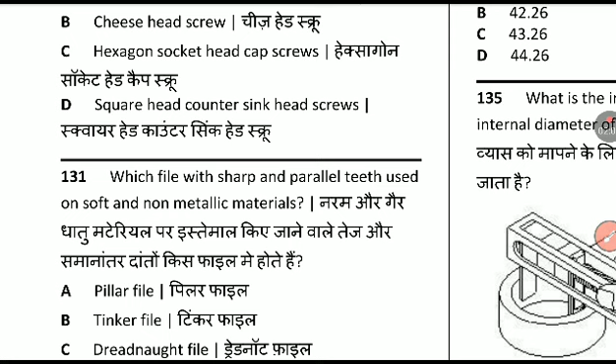131. Which file with sharp and parallel teeth is used on soft and non-metallic materials? Option A pillar file, option B tinker file, option C dreadnought file, option D warding file. Option C, dreadnought file, will be the correct answer for question number 131. Pillar file is used for filing narrow grooves, slots, and keyways.

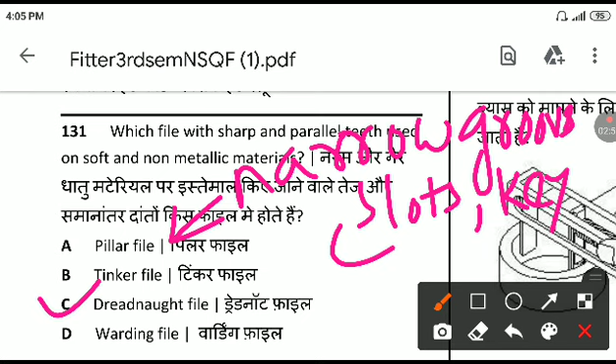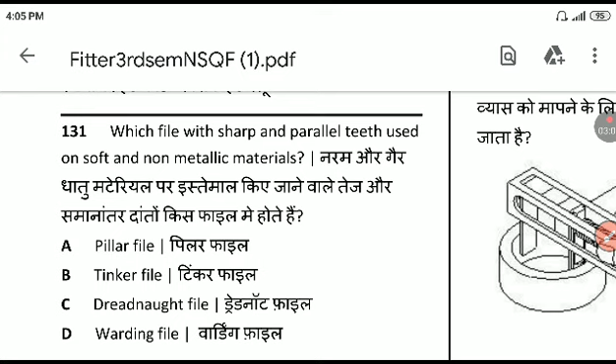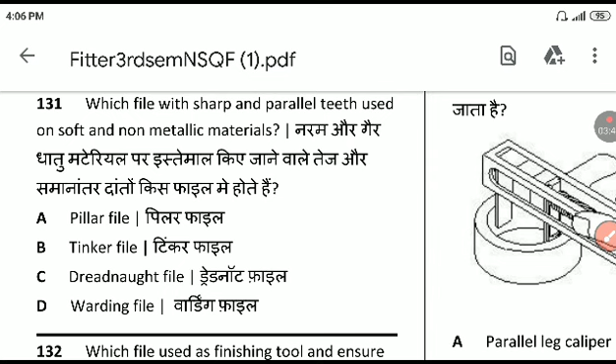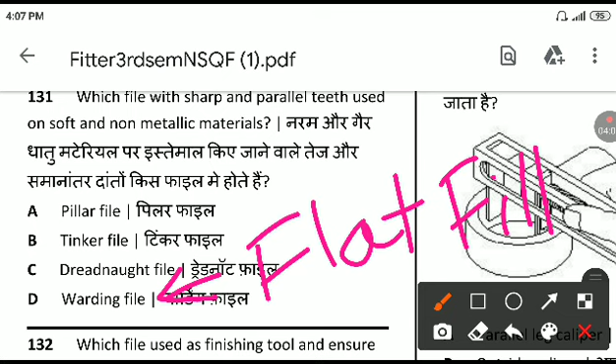Tinker file is used for finishing automobile bodies after tinkering. Warding file is used for flat filing, filing on slots, and keyways.

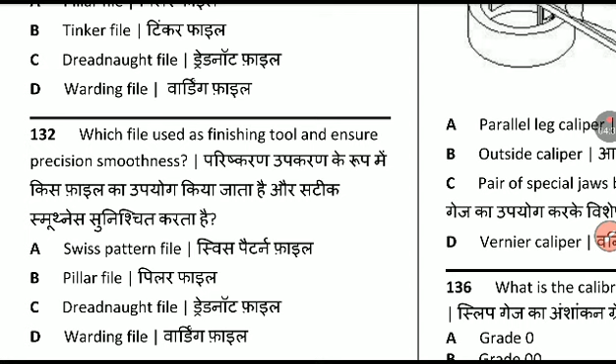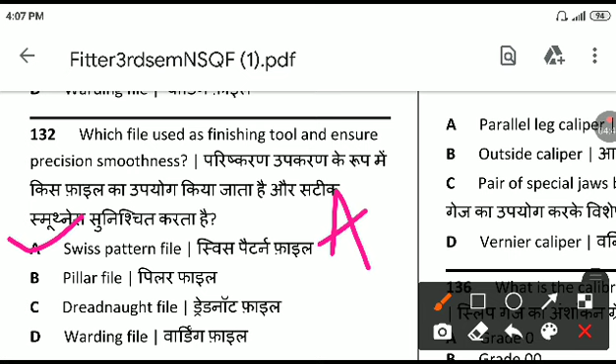Next question, 132. Which file is used as a finishing tool and ensures precision smoothness? Option A, Swiss pattern file, is the correct answer. Swiss pattern file is used as a finishing tool and ensures precision smoothness.

133. What is the thickness range of a BIS set of feeler gauge? Option B is the correct answer: 0.02 mm to 1 mm in steps of 0.02 mm.

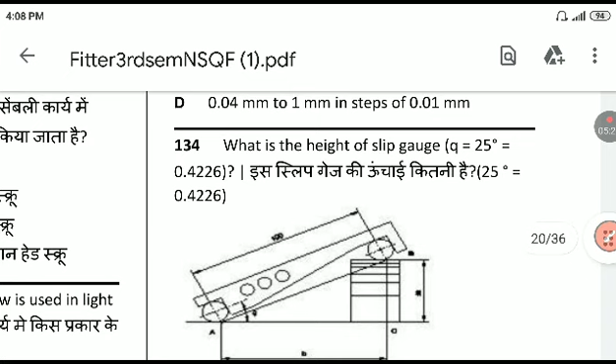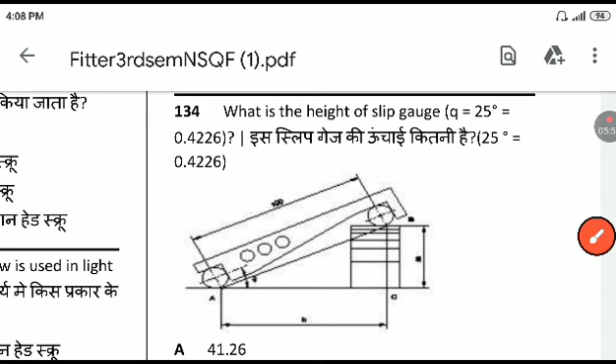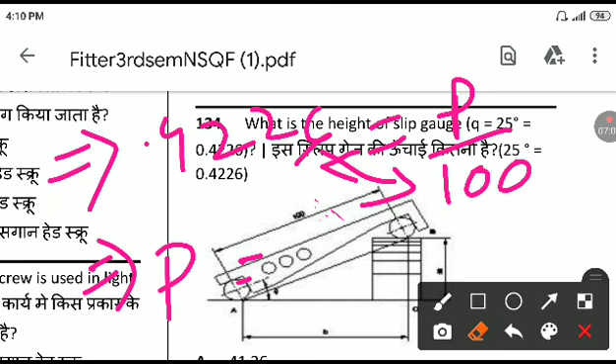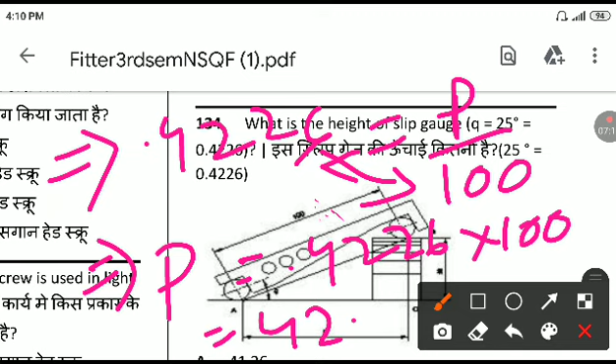What is the height of slip gauge, given theta equal to 25 degrees, sin theta equal to 0.4226? We know that sin theta equal to P by H, where theta means 25 degrees, P means perpendicular, which here is the height of the slip gauge, and H means length of hypotenuse, equal to 100. So sin 25 equal to P by H, that is 0.4226 equal to P by 100. By cross multiplication, P equal to 0.4226 into 100, that is equal to 42.26. Answer, option B.

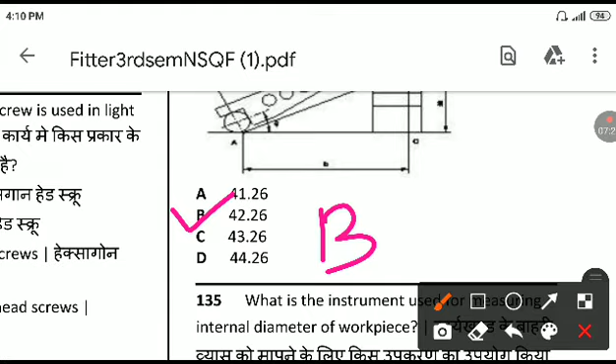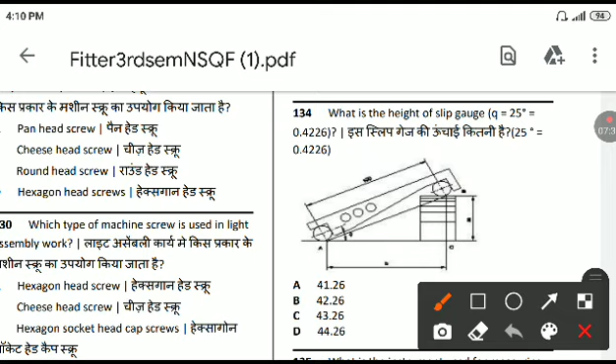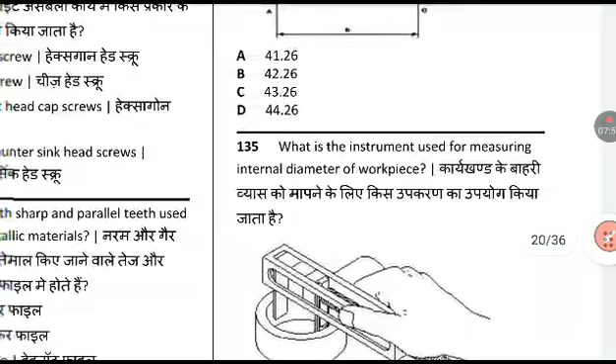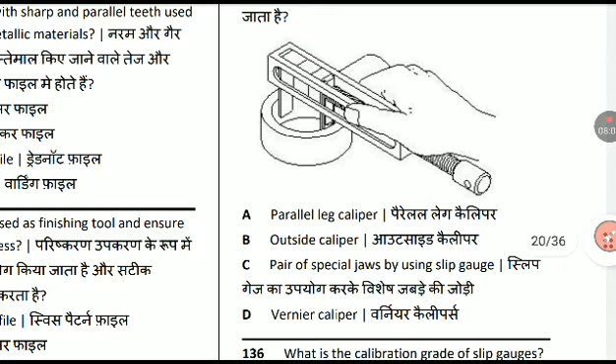What is the instrument used for measuring internal diameter of a workpiece? Options: parallel leg caliper, outside caliper, pair of special jaws by using slip gauge, or vernier caliper. Option C is the correct answer: pair of special jaws by using slip gauge.

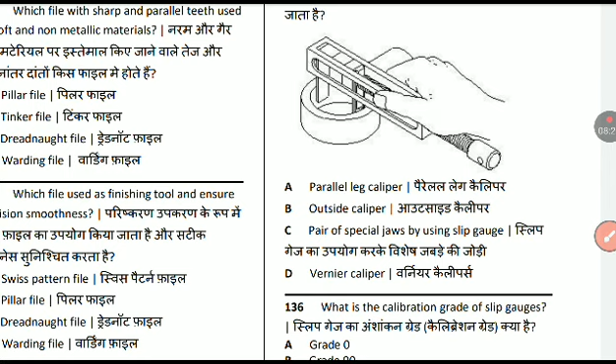What is the calibration grade of slip gauges? Option A grade 0, option B grade 00, option C grade 1, option D grade 2. Option B, grade 00, is the correct answer.

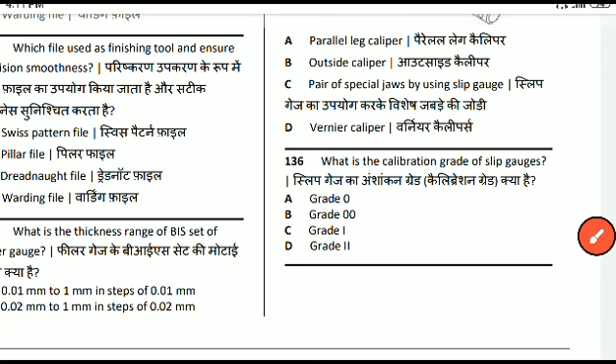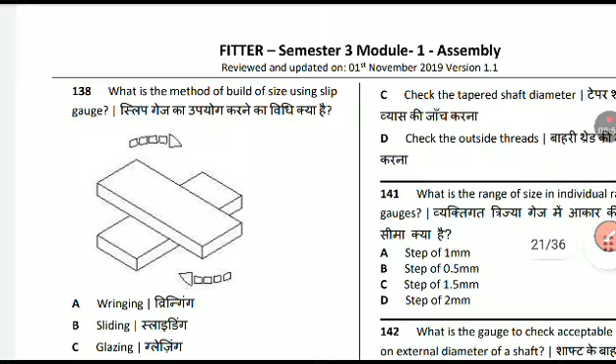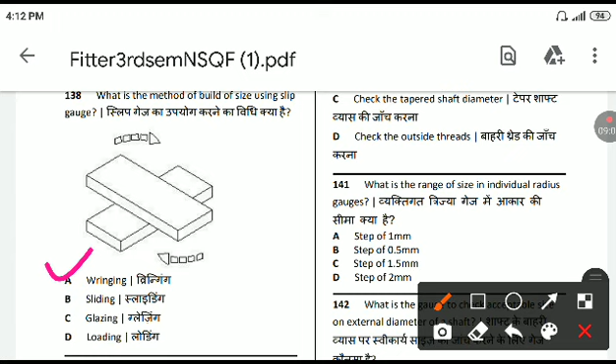What is the method of building up a size using slip gauge? This process is called wringing, option A. Wringing means joining two slip gauges together. The process in which slip gauges are joined together is called wringing.

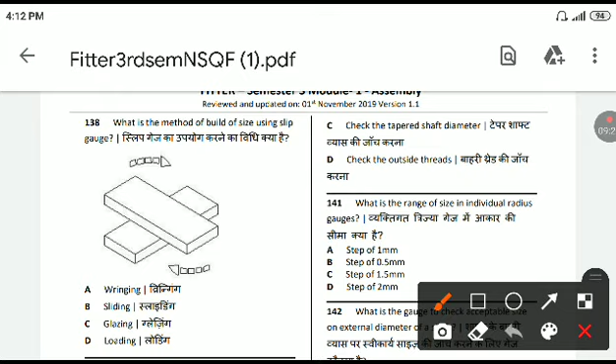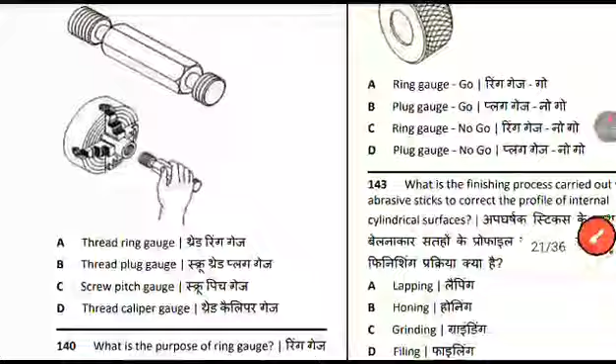What is the gauge used for checking threads? Option A thread ring gauge, option B thread plug gauge, option C screw pitch gauge, option D thread caliper gauge. Option B, thread plug gauge, is the correct answer.

What is the purpose of a ring gauge? Option A, check the outside diameter. Ring gauge is used to check the outside diameter and check the external dimension. Option A is the answer.

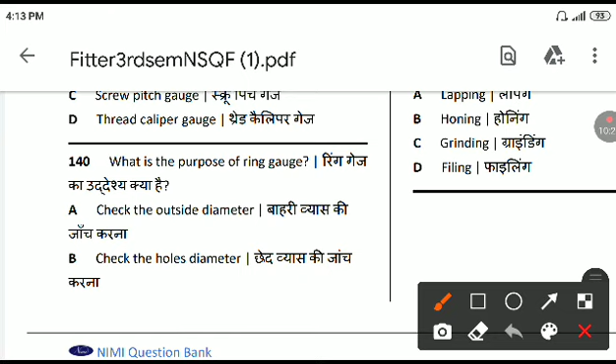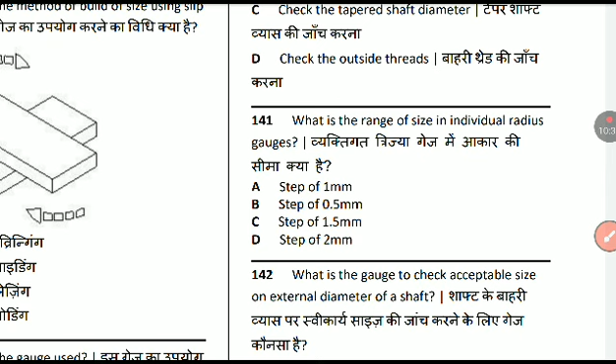What is the range of size in an individual radius gauge? Option A, in steps of 1 mm.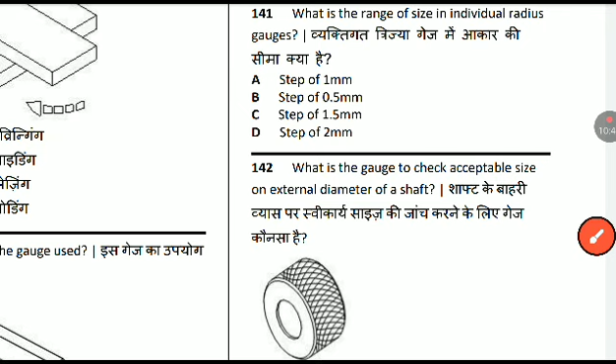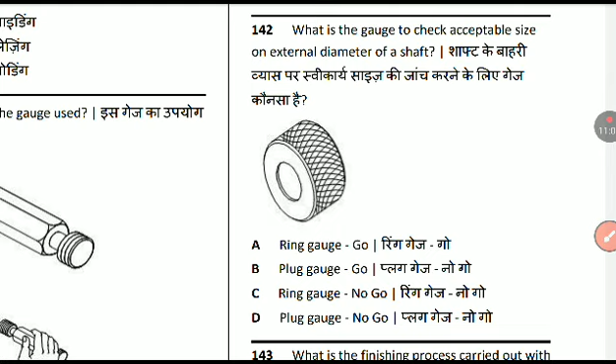What is the gauge used to check acceptable size on the external diameter of a shaft? Options: ring gauge go, plug gauge go, ring gauge no go, plug gauge no go. Ring gauge go, option A, is the correct answer.

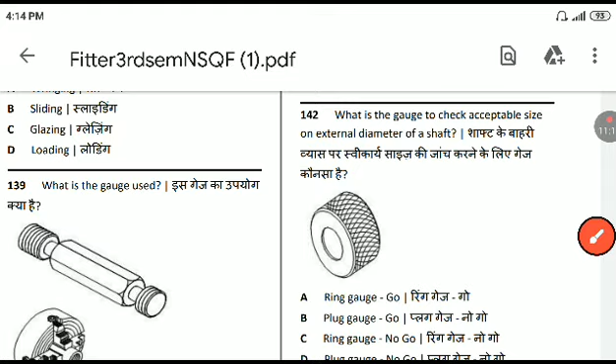What is the finishing process carried out with an abrasive stick to correct the profile of an internal cylindrical surface? Option B, honing, is the correct answer.

Which lapping material is used for easy charging and rapid coating? Option A cast iron, option B copper and brass, option C close grain cast iron, option D white cast iron. Option B, copper and brass, is the correct answer.

Which lap material is inexpensive and can be expanded if worn out? Options: brass, cast iron, lead, bronze. The answer is option C, lead, also known as plumbum, Pb.

Which type of abrasive material is extremely hard and used in lapping for heavy stock removal? Option A silicon carbide, option B aluminum oxide, option C boron carbide, option D diamond.

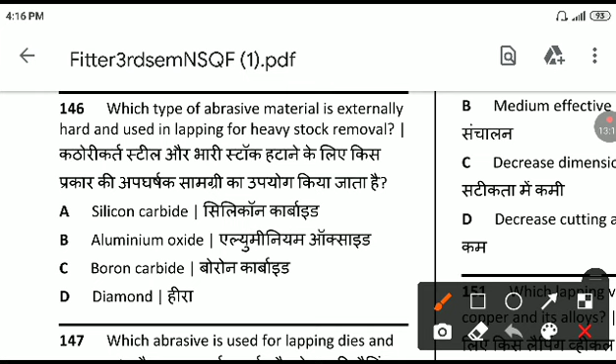Which abrasive is used for lapping dies and gauges? Option A, silicon carbide. Option B, boron carbide... wait, silicon carbide. Option C, diamond. Option D, aluminum oxide.

Which is the hardest of all abrasive materials and used for lapping? Option A, silicon carbide. Option B, boron carbide. Option C, diamond. Option D, aluminum oxide. Answer: diamond, option C.

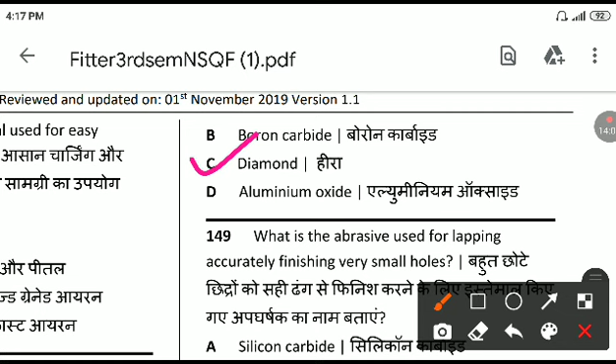What is the abrasive used for lapping and accurately finishing very small holes? Option A, silicon carbide. Option B, diamond. Option C, boron carbide. Option D, aluminum oxide. Answer: diamond, option B.

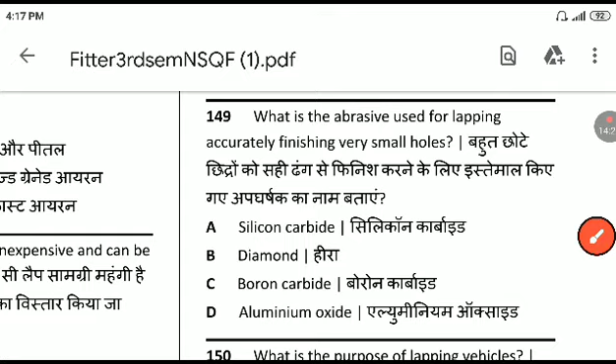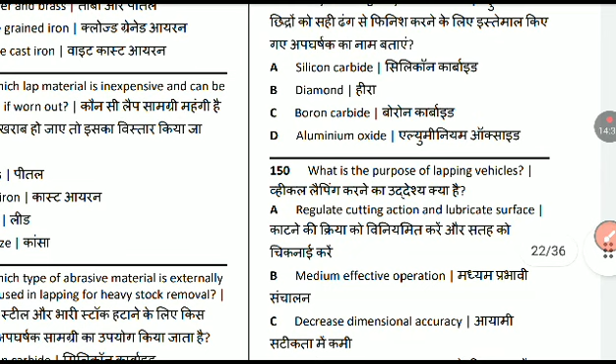Question 150: What is the purpose of lapping vehicles? Option A, regulate cutting action and lubricate surface. Option B, medium effective operation. Option C, decrease dimensional accuracy. Option D, decrease cutting ability.

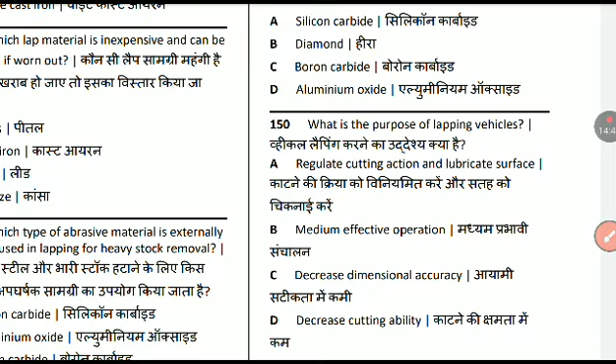What is the purpose of lapping vehicles? Question 150, option A: regulate cutting action and lubricate surface. Question 151: Which lapping vehicle is used for lapping copper and its alloys?

Option A, vegetable oil. Option B, machine oil. Option C, soluble oil. Option D, petroleum jelly. Used for lapping copper and its alloy - answer: option C, soluble oil.

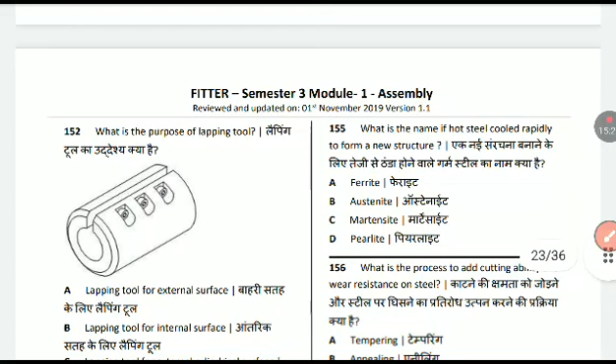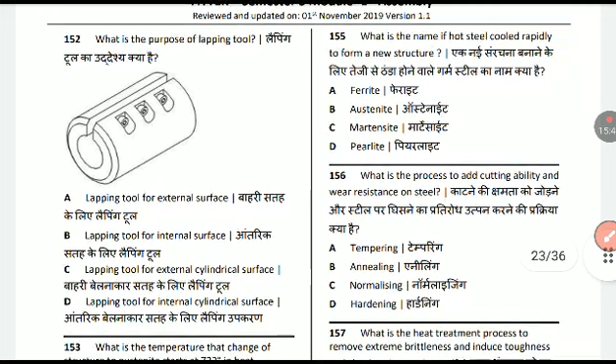What is the purpose of lapping tool? Lapping tool for external surface, lapping tool for internal surface, lapping tool for external cylindrical surface, lapping tool for internal cylindrical surface. Answer: lapping tool for external cylindrical surface, option C.

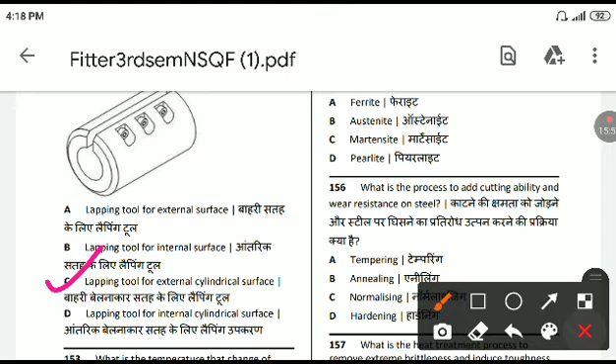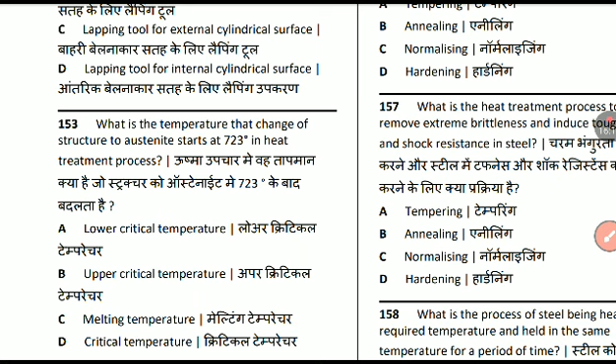What is the temperature at which structure changes to austenite, starting at 723 degrees Celsius, in the heat treatment process? Option A, lower critical temperature. Option B, upper critical temperature. Option C, melting temperature. Option D, critical temperature. Answer: option A, lower critical temperature. At this temperature the structure changes to austenite starts to change.

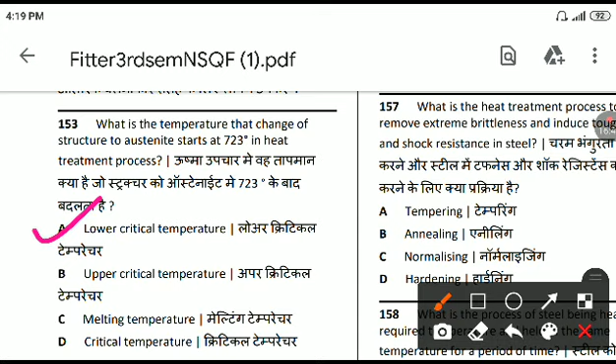What is the process if hot steel is cooled slowly and the old structure is retained, resulting in fine grains that make it easily machined? Question 154: A, annealing. B, hardening. C, tempering. D, normalizing. Answer: option A, annealing.

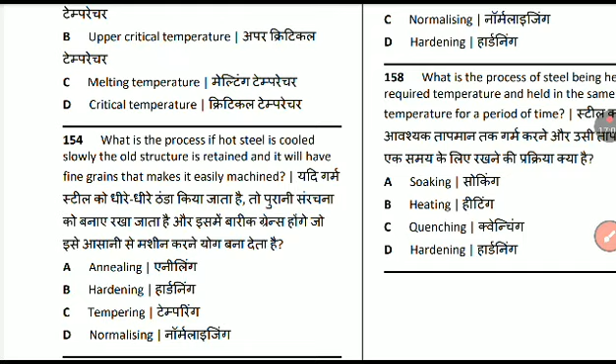What is the name of the process if hot steel is cooled rapidly to form a new structure? Options: ferrite, austenite, martensite, pearlite. Answer: martensite, option C.

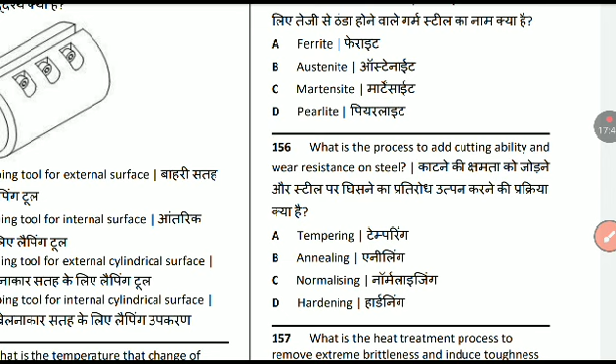What is the process to add cutting ability and wear resistance on steel? Options: tempering, annealing, normalizing, hardening. Answer: hardening, option D.

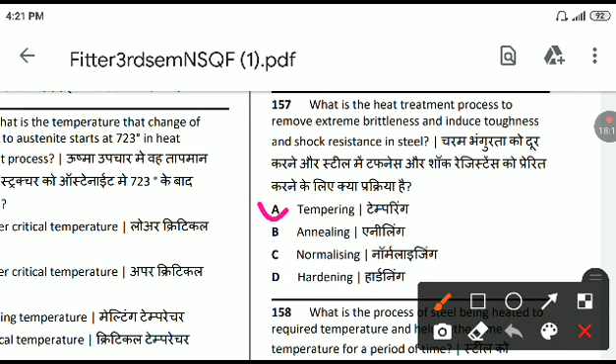What is the heat treatment process to remove extreme brittleness and induce toughness and shock resistance in steel? Answer: tempering, option A.

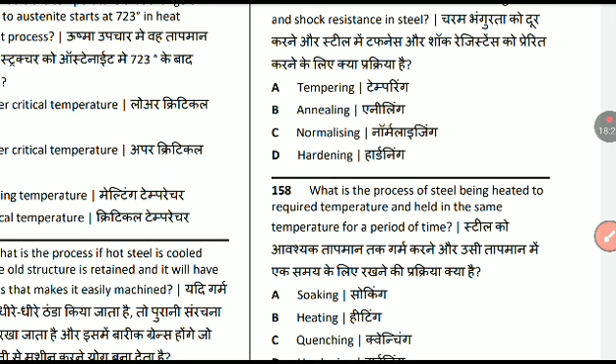What is the process of steel being heated to a required temperature and held at the same temperature for a period of time? Options: soaking, heating, quenching, hardening. Answer: soaking, option A.

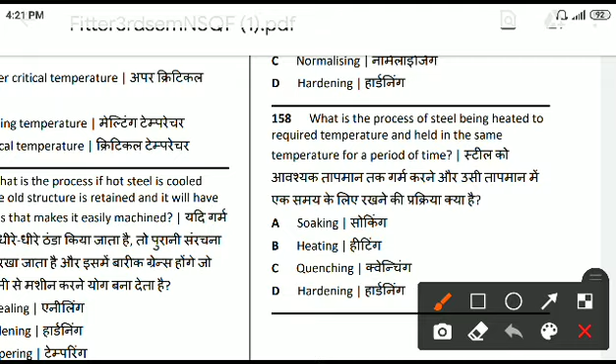What is the purpose of brine solution, water, oil and air used in the heat treatment process? Answer: quenching, option B.

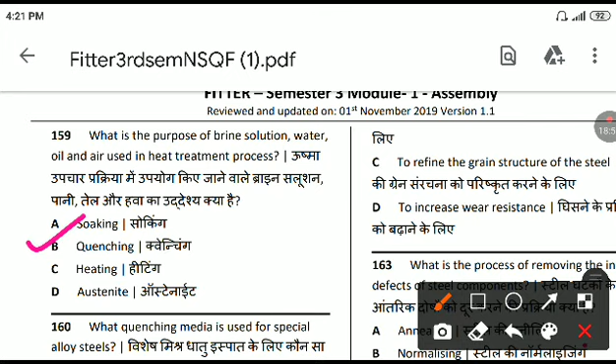What quenching media is used for special alloy steel? Options: brine solution, water, oil, cold air. Answer: cold air, option D.

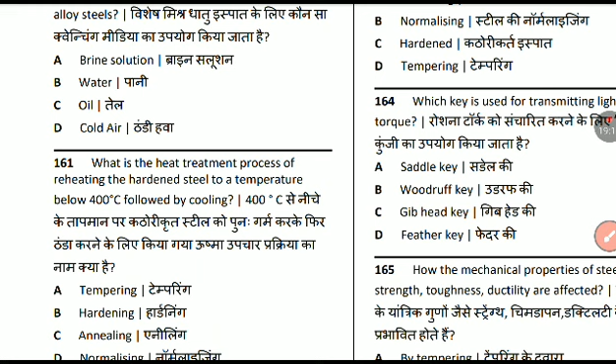What is the heat treatment process of reheating hardened steel to a temperature below 400 degrees Celsius followed by cooling? Question 161. Options: tempering, hardening, annealing, normalizing. Answer: tempering, option A.

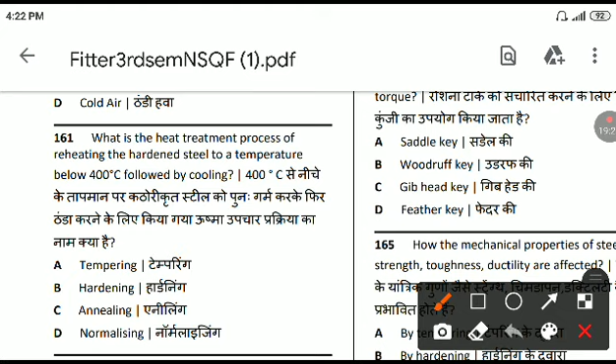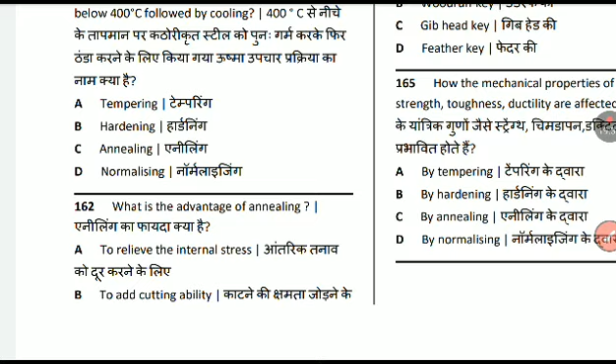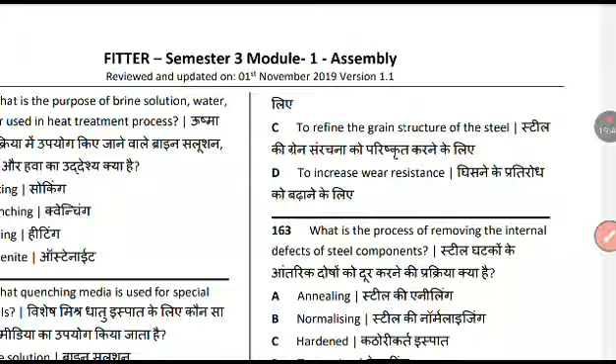What is the advantage of annealing? Options: to relieve internal stress, to add cutting ability, to refine grain structure of steel, to increase wear resistance. Answer: option A, to relieve internal stress.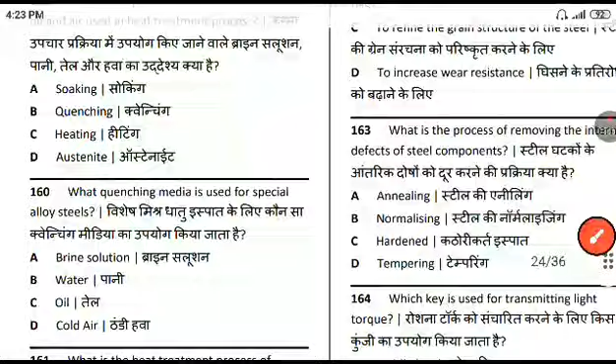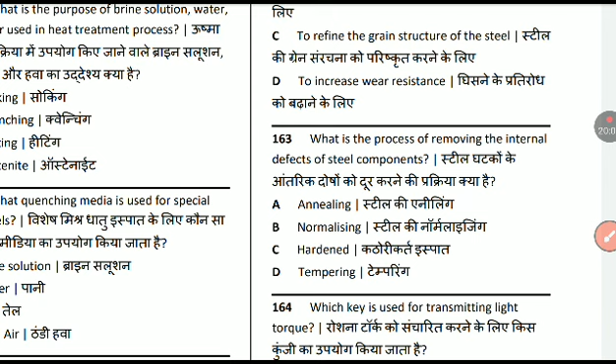What is the process of removing the internal defects of steel components? Option A, annealing. Option B, normalizing. Option C, hardened. Option D, tempering. Answer: normalizing, option B.

Which key is used for transmitting light torque? Option A, saddle key. Option B, woodruff key. Option C, gib head key. Option D, feather key. Answer: option B, woodruff key.

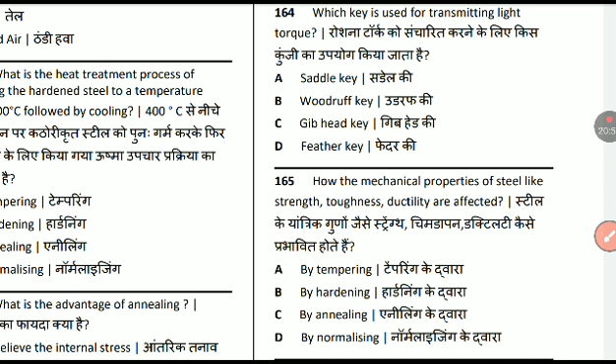How are the mechanical properties of steel like strength, toughness, and ductility affected - by tempering, by hardening, by annealing, or by normalizing? Answer: by hardening, option B.

Which bearing material has poor thermal conductivity? Options: nylon, Teflon, sintered alloy, laminated phenolics. Answer: option D, laminated phenolics.

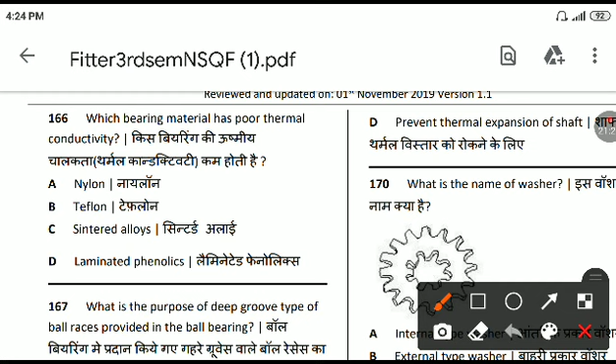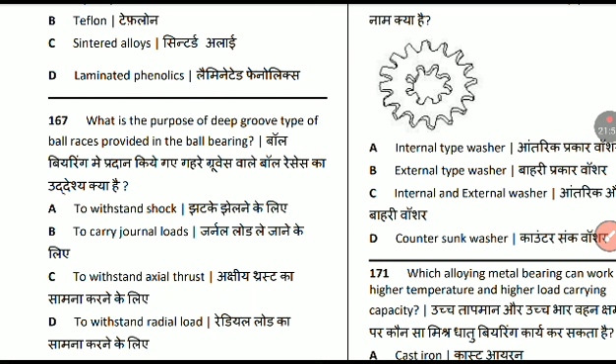What is the purpose of the deep groove type of ball races provided in the ball bearing? Options: to withstand shock, to carry journal loads, to withstand axial thrust, to withstand radial load. Answer: option C, to withstand axial thrust.

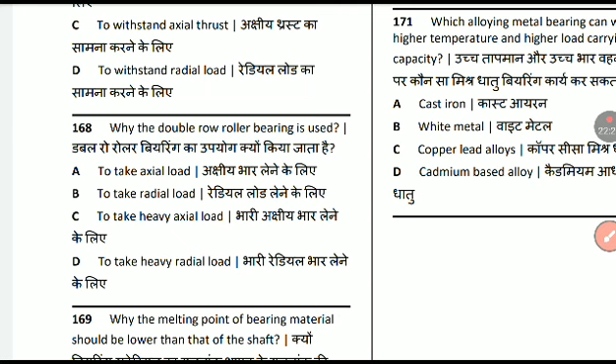Why is the double row roller bearing used? Option A, to take axial load. To take radial load. To take heavy axial load. To take heavy radial load. Answer: option D, to take heavy radial load.

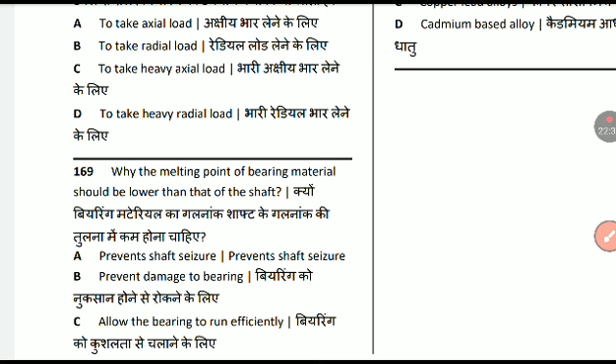Why should the melting point of bearing material be lower than that of the shaft? Options: prevent shaft seizure, prevent damage to bearing, allow the bearing to run efficiently, and prevent thermal expansion of shaft.

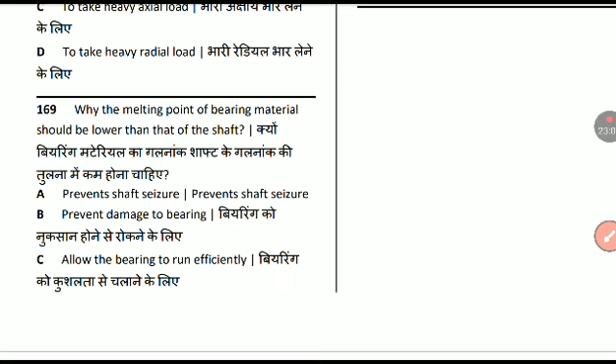Why should the melting point of bearing material be lower than that of the shaft? Answer: to prevent the shaft seizure, option A.

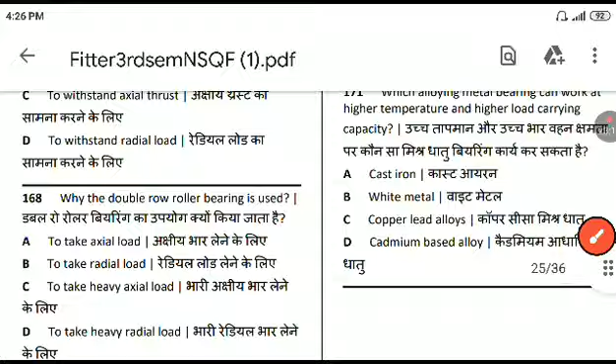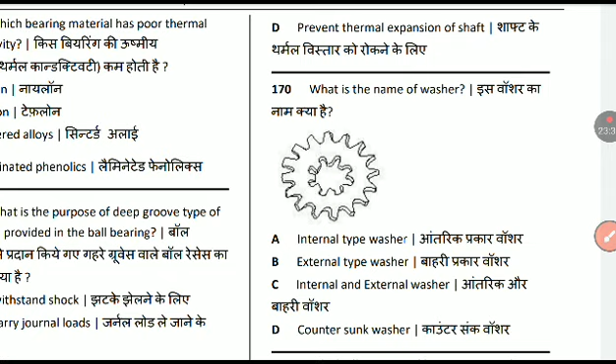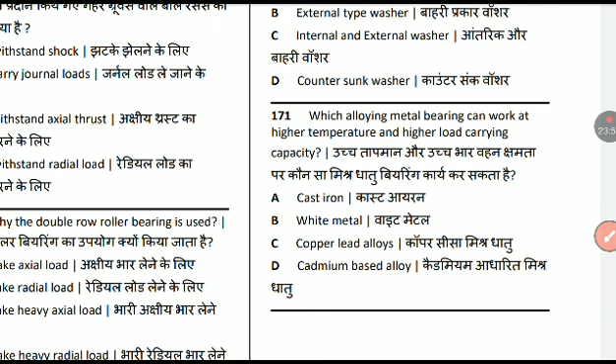Which alloying metal allows a bearing to work at higher temperature and with higher load carrying capacity? Option A, cast iron. Option B, white metal. Option C, copper lead alloy. Option D, cadmium base alloy. Answer: cadmium base alloy, option D, cadmium CD.